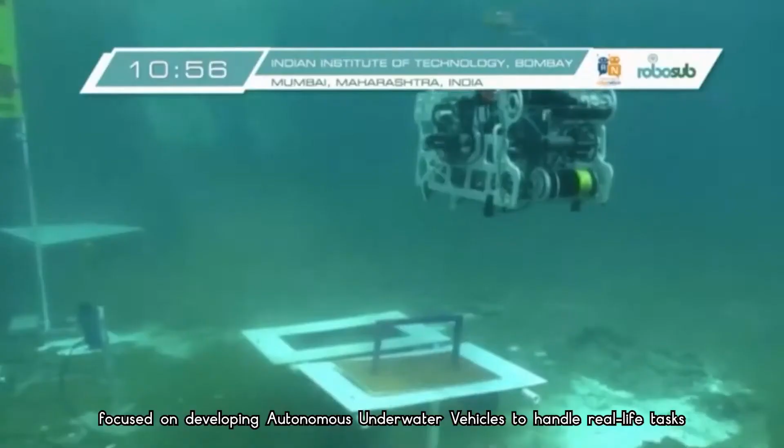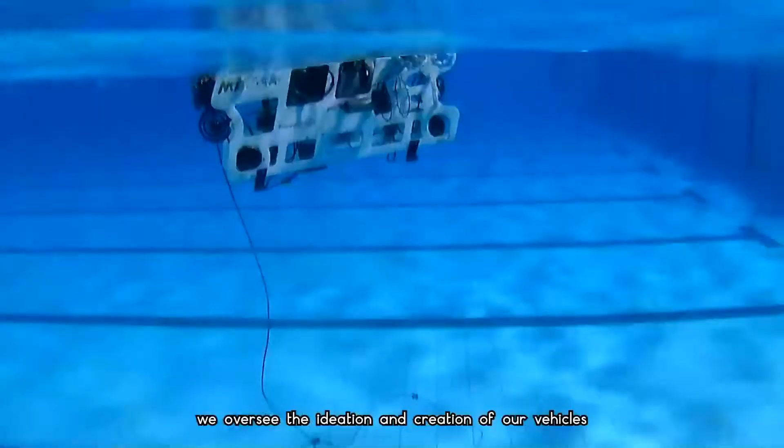AUV-IITB is a multidisciplinary team of 55 members focused on developing autonomous underwater vehicles to handle real life tasks. Through the consistent effort put in by members of our 3 subdivisions, we oversee the ideation and creation of our vehicles. Our flagship series is named Matsya, which is derived from the Sanskrit word for fish.

Hi, I am Sanjyoti Naran, a fourth year undergraduate from the Department of Electrical Engineering at IIT Bombay. I am the current team leader of AUV-IITB. Hi everyone, I'm Akshat Rajlat, a senior undergraduate student at the Department of Mechanical Engineering, IIT Bombay. I'm one of the current team leaders of Team AUV-IITB. Hi, I'm Mohan Abhyas, fourth year undergrad from Computer Science Department, and I'm one of the current team leaders.

Hi, I'm Nakul, a third year undergrad from Aerospace Department, and I am the Mechanical Subdivision Head. And this is the Mechanical Subdivision of the team. Hi, I'm Aditya, a third year undergrad from the Electrical Department, and I'm the Electrical Subdivision Head. And this is the Electrical Subdivision of the team. Hello, I am Andrew, a third year undergrad from the Electrical Engineering Department, and I am the Software Subdivision Head. And this is the Software Subdivision of the team.

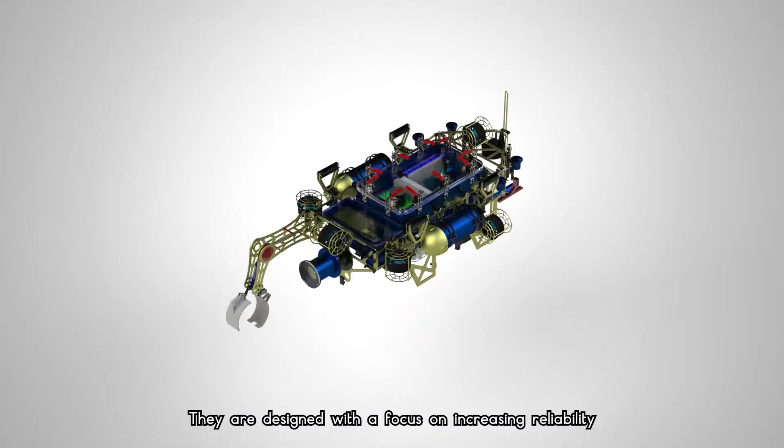Hulls are waterproof enclosures that house all the electronics, sensors, and other water-sensitive components. They are designed with a focus on increasing reliability, modularity, compactness, and providing efficient heat dissipation. The making of a hull is a rigorous process consisting of ideation, design, simulation, fabrication, assembly, and final waterproofing, following which the electronics are assembled in them.

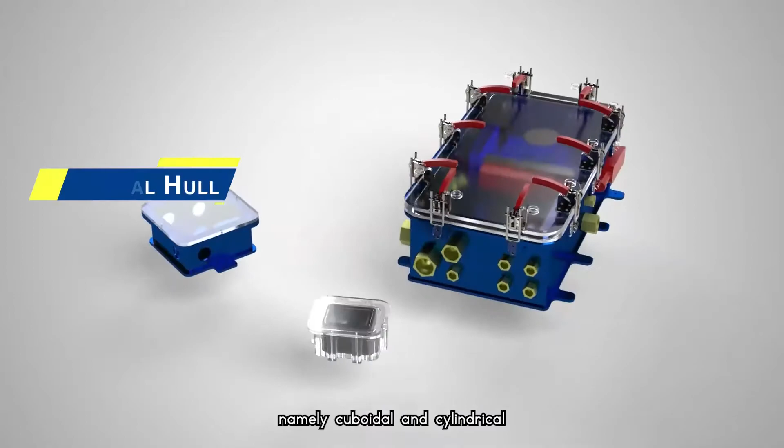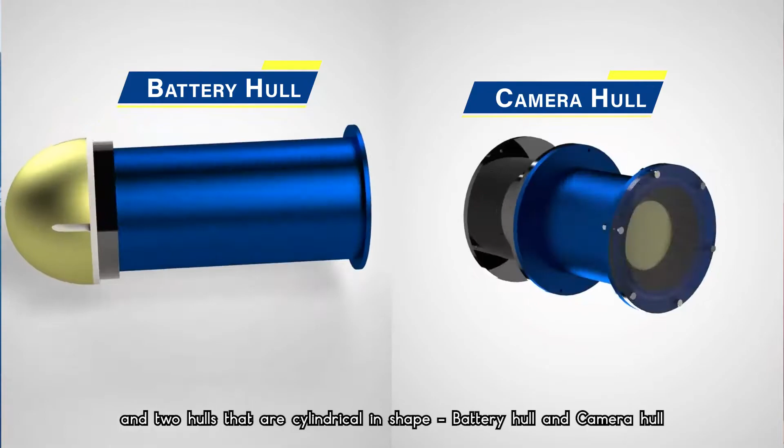We use a multi-hull system with two types of hulls, namely cuboidal and cylindrical, for increasing accessibility and minimizing the chances of total system failure. In Matsya 6, we have 3 hulls which are cuboidal in shape: main hull, DVL hull, and ESC hull, and 2 hulls that are cylindrical in shape: battery hull and camera hull. Mostly we use aluminium alloys and acrylic to make the hulls.

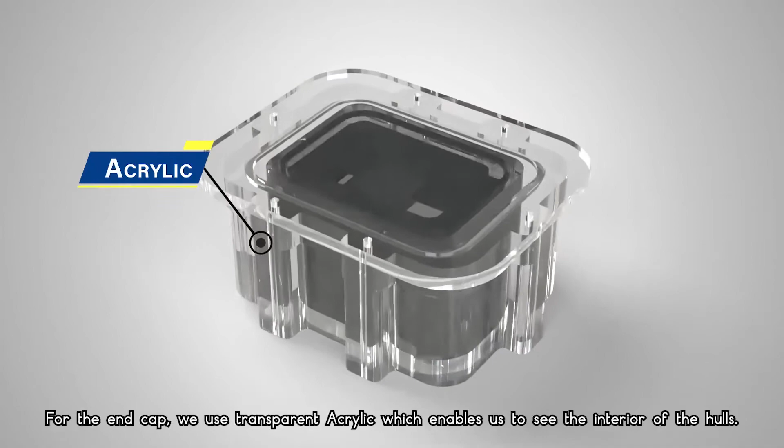Aluminium 5052 is used for sidewall hull as it has higher malleability, whereas aluminium 6061 is used for the base plates as it is much harder to deform permanently. The IMU hull is made purely out of acrylic. For the end cap, we use transparent acrylic, which enables us to see the interior of the hulls. For ensuring rugged waterproofing, all the hulls undergo vacuum impregnation, which is an industrial porosity sealing technique.

Let's start our journey with designing. When it comes to hull designing, noting down various requirements is the first thing to do. Requirements from mechanical viewpoint like stability, weight, depth rating, hydrodynamics, and from electrical perspective, modularity, accessibility of inner components, heat dissipation, ease of assembly are considered. Keeping in mind these requirements, we choose the shape of hull, following which a rough CAD is made.

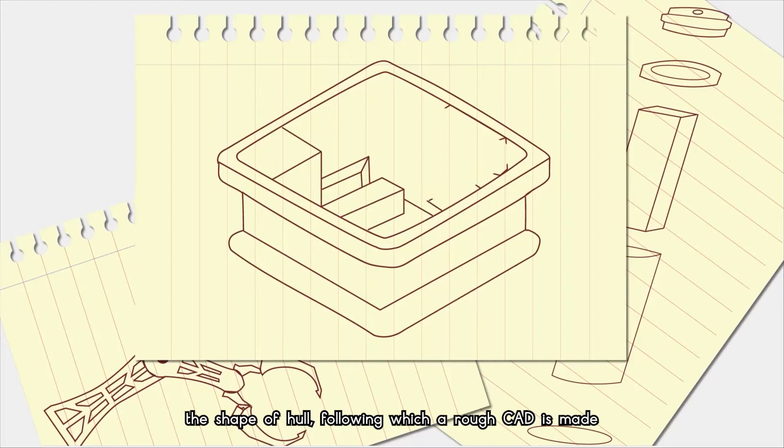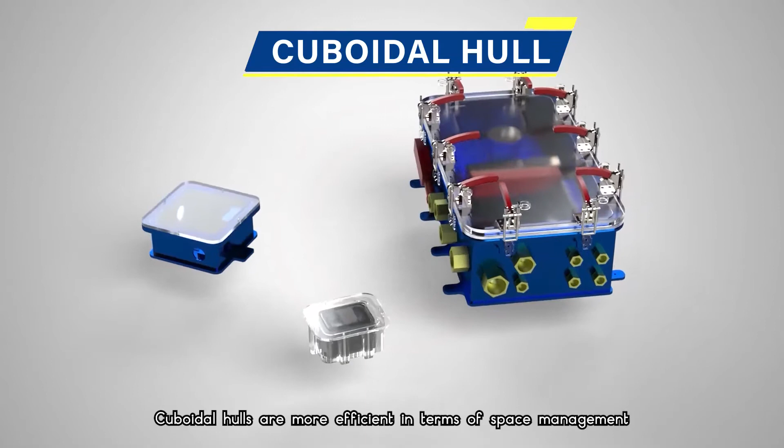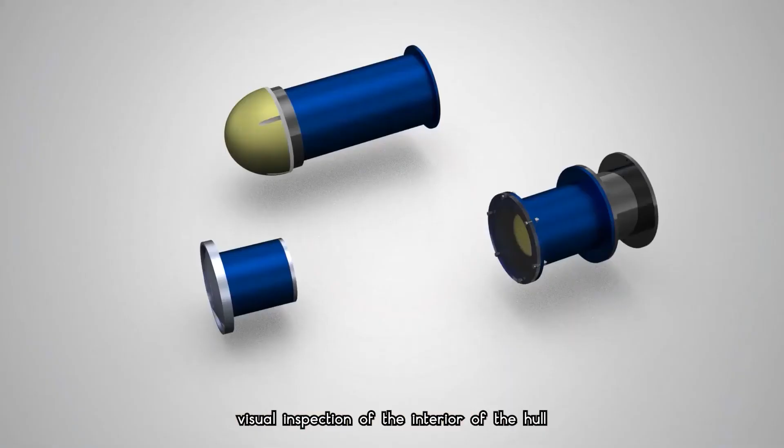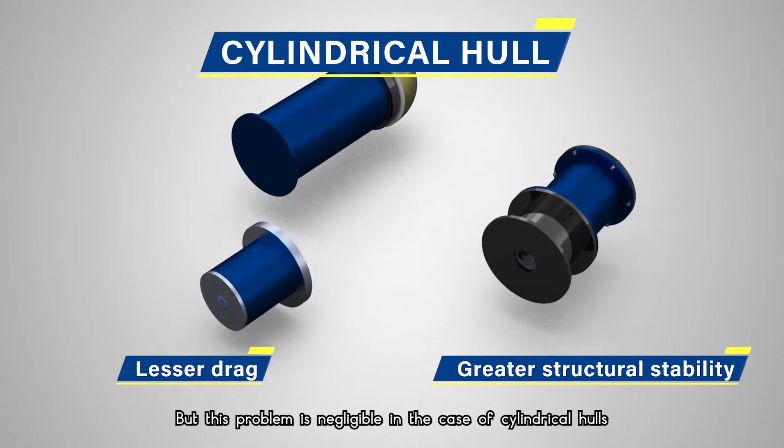We generally make hulls of two shapes, cuboidal and cylindrical. Both designs have their pros and cons. Cuboidal hulls are more efficient in terms of space management, offer a greater area to attach penetrators, and provide better heat dissipation. Moreover, we can also attach a transparent end cap to facilitate visual inspection of the interior of the hull. Cylindrical hulls, on the other hand, offer a lesser drag and have greater structural stability at higher depth. Cuboidal hulls may fail at edges and vertices, but this problem is negligible in case of cylindrical hulls.

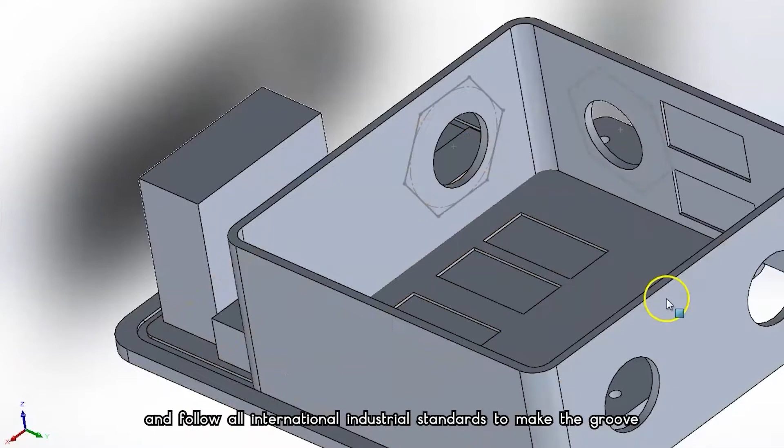Following designing, it's now time to make the CAD of the hull. After making a rough sketch, we move on to making a precise 3D model of the hull in SolidWorks. We use ISO 3601 certified O-rings and follow all international industrial standards to make the groove, thereby minimizing the chances of O-ring failure due to potential misalignment between the groove and the O-ring. Now we test the hull in the real-world scenario by doing structural analysis.

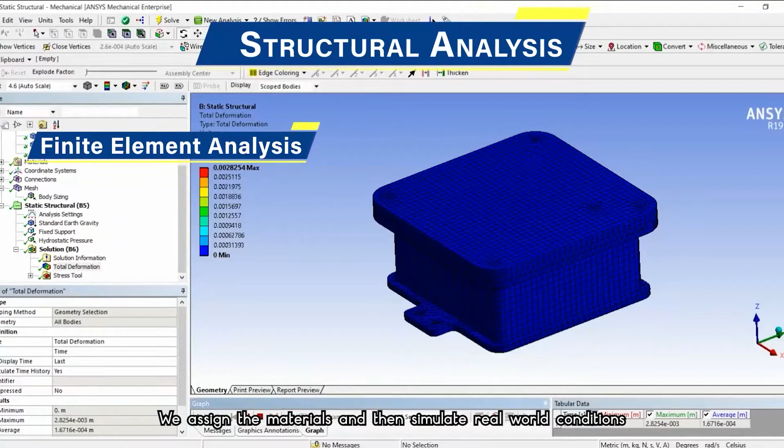Structural analysis. After CADing is completed, all the hulls are analyzed via the finite element analysis method in ANSYS. We assign the material and then simulate real-world conditions. We then get the stress, the deformation, and the safety factor for the model. We ensure that the hulls have a safety factor greater than 1.5. If the safety factor is less than that, we find the cause of the failure and make necessary changes in the CAD, such as changing the thickness and adding supports until we achieve a satisfactory value. This ensures that the model does not fail in a high pressure condition.

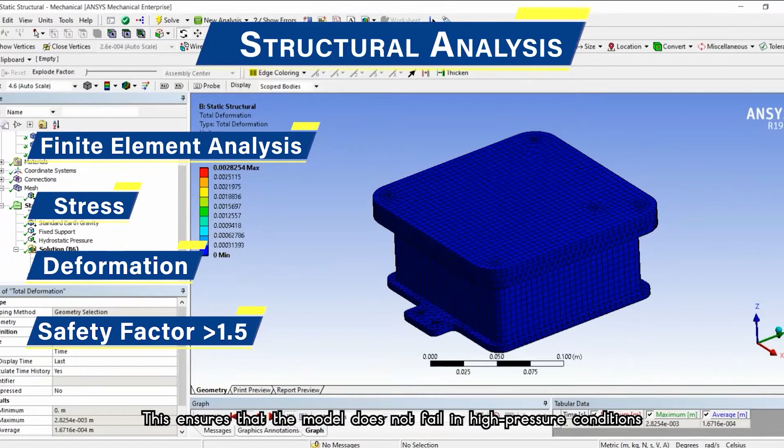All the hulls also undergo extensive linear buckling analysis in ANSYS to calculate the optimum thickness and the weight of the hull. Critical buckling load is calculated through load multiplier to ensure that our hulls don't deform severely or collapse. After examining individual hulls, drag analysis of the vehicle is done using ANSYS Fluent. Next up, we have CDR.

Once we are done with the analysis, an extensive critical design review of the CAD is conducted. In this, all our experienced peers in the team examine the CAD extensively for any shortcomings. If there are any issues, we reiterate the design by incorporating the necessary modifications. This process is inherently iterative, thus repeated until all requirements are met.

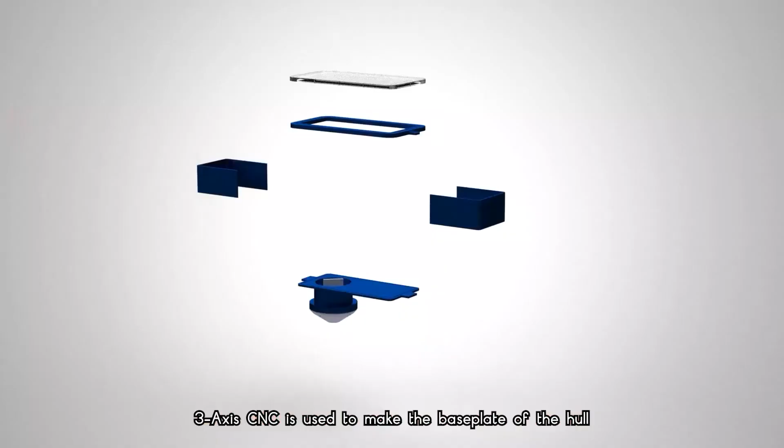And finally, we have the last stage, manufacturing. Once an iteration passes the CDR, we are ready for manufacturing. We use a variety of manufacturing methods to make the hull. 3-axis CNC is used to make the base plate of the hull. The side walls are manufactured by welding two C-shaped segments together.

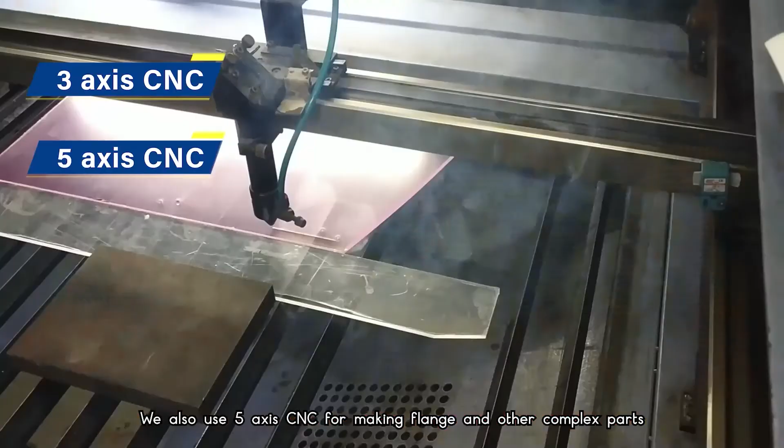In case of cylindrical hulls, we directly procure annular cylinders of the required dimensions. We also use 5-axis CNC for making the flange and other complex parts. We use laser cutting and water jet cutting for making the frame and 3D printing for internal support structure and much more. Congratulations! Now you know everything to make your own hull.

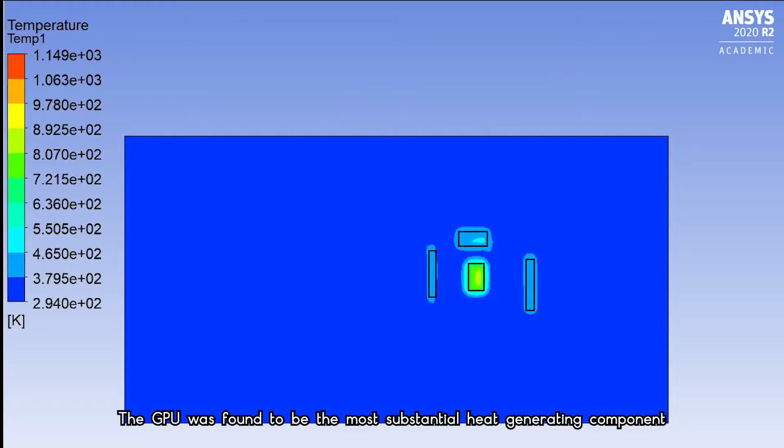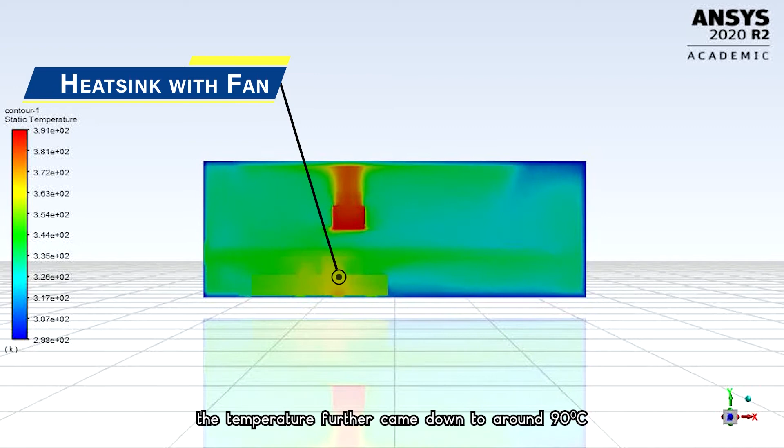Heating up of the main hull has been a major problem as it houses the components that generate a significant amount of heat. The GPU was found to be the most substantial heat generating component. We started with the model with no heat sinks and fans and found the temperature to be reaching as high as 630 degrees centigrade on the GPU chips. The temperature came down to 200 degrees upon placing a heat sink on the GPU chip. After the inclusion of a fan, the temperature further came down to around 90 degrees centigrade, similar to what we observed in M5 during pool testing.

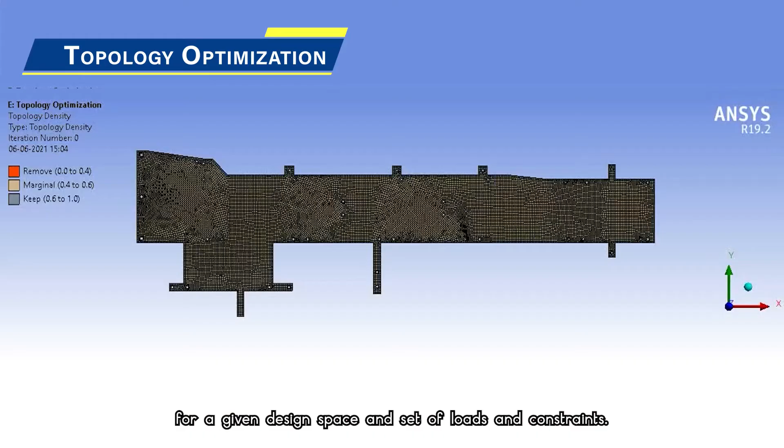Topology optimization is a tool to find the optimal shape for a given design space and set of loads and constraints. It's an effective technique to optimize a structural design and to minimize waste. Typically, our goal is to maximize stiffness while reducing weight. We perform topology optimization on a frame of Matsya 6. First, static structural analysis is done and then linked to the topology optimization module of ANSYS.

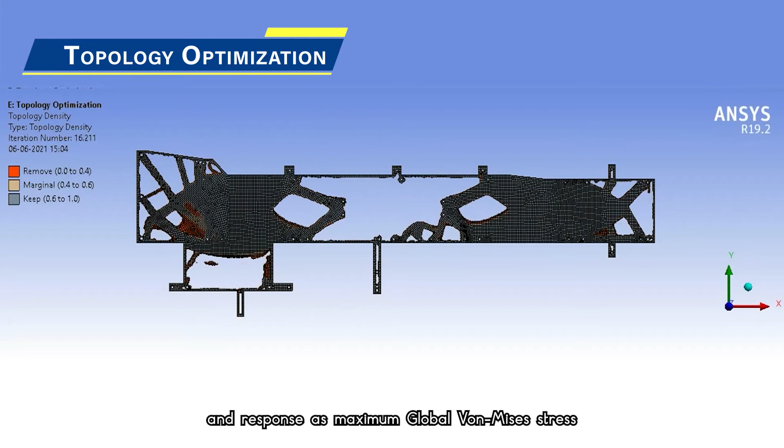We performed analysis using compliance as an objective and response as maximum global von Mises stress. Convergence accuracy was set up at 0.1% and maximum iterations to 500. Once the validation of optimized design in static structure has been done, the model gets finalized, ensuring that it passes all the criteria and constraints.

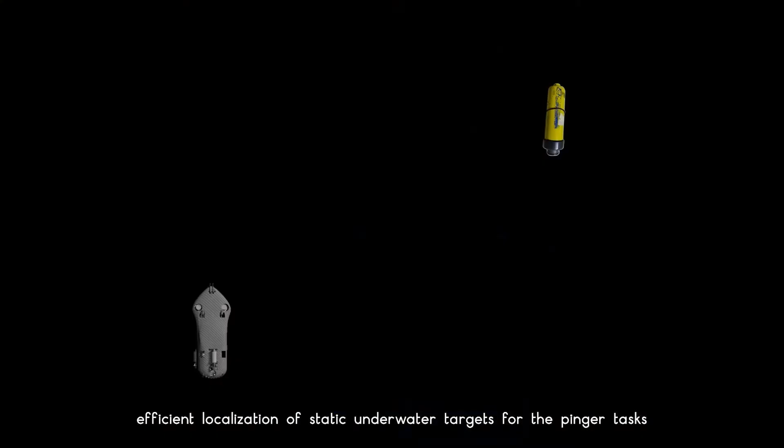Pinger localization on the FPGA. This project was undertaken to replace the DAQ for faster and more efficient localization of static underwater targets for the Pinger task. We had implemented the TDOA algorithm on the Xilinx Zynq ZC7020 FPGA using custom designed IPs. And by using hardware for real-time processing, we have reduced the load on our SBCs as well. The design and the implementation on the FPGA was successful in testing, and we have successfully replaced the DAQ.

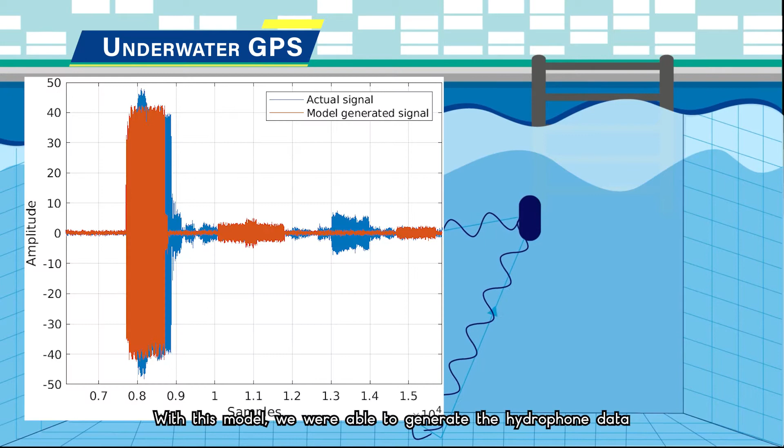Underwater GPS. An AUV can localize another AUV with an acoustic pinger and an array of 4 hydrophones. The pinger emits the ping in a swimming pool environment, taking into account reflections, attenuation, and the Doppler effect. With this model, we are able to generate the hydrophone data comparable with the original data from RoboSub. We modified our current algorithm of pinger localization, adding real-time ping detection.

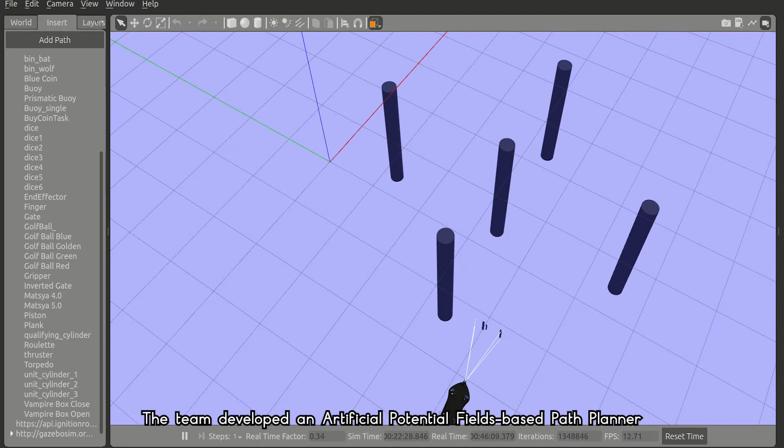Path planner and path follower. For effective obstacle avoidance in underwater environments, it was felt necessary to include a path planner module in the navigator. The team developed an artificial potential fields-based path planner that would return smooth paths for traversal through the RoboSub environment without the need to maintain a grid map of the domain. To aid the performance of obstacle avoidance, we integrate our path follower model, which fits splines to the given set of points and feeds targets to the controller. This module has been tested extensively in the simulator.

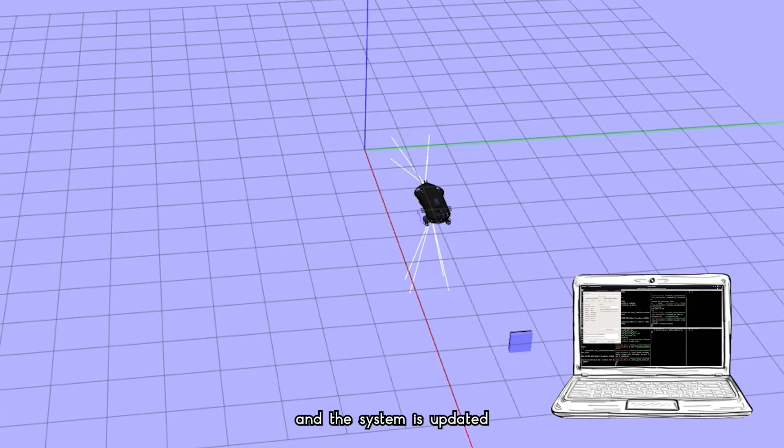In case of an unexpected shutdown of the vehicle, a system of logging data was implemented so as to resume operation from the same point. These logs are then parsed for the data and the system is updated with the memory of what was being done prior to the shutdown.

Hello, I'm Vinayak, a second year undergraduate from the Material Science Department and a member of Business Subdivision of the team. I'm the lead in charge of video presentation for RoboSub 2021. Hi, I'm Nandini, a first year undergraduate from the Chemistry Department and a member of Business Subdivision of the team. I worked on designing the flow chart and created all of the illustrations used in the video.

Hi, I am Abir Mishra, a first year undergrad from the Physics Department and a member of the Business Subdivision of Team AUV IITB. I have been responsible for the video editing and animations part. Hi, I'm Sanya, a first year undergrad at the Material Science Department and a member of the Business Subdivision. So I was responsible for the narration and script for this video, and this was Team AUV IITB.